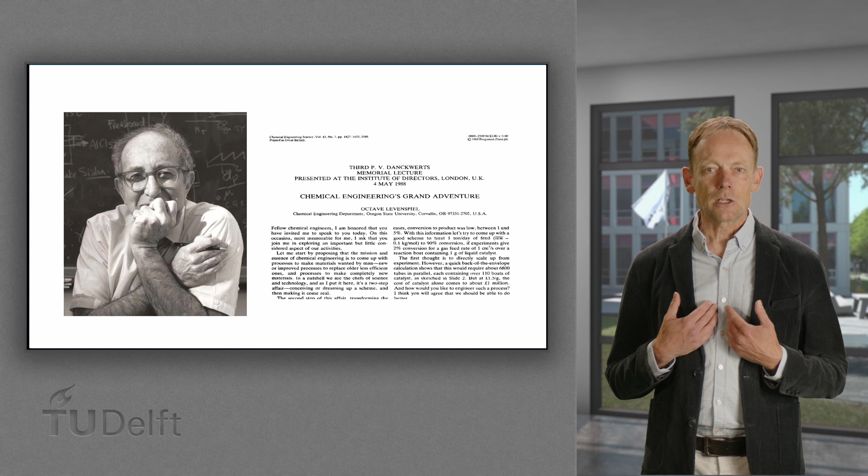One of the most influential professors in chemical engineering, Octave Levenspiel from Oregon State University in the United States, outlined in a 1988 publication the grand adventure of chemical reaction engineering. And this inspired us 30 years later to sketch what would be the grand adventure of biochemical reaction engineering, also known as industrial fermentation.

This course will bring you up to speed in this research and engineering field in a series of topics related to bioproducts, renewable feedstocks, how they are converted in large-scale bioreactors or fermenters, and what is needed to design, operate, and improve high-performance and robust fermentations. We will illustrate this with the key example of the monomer 1,3-propanediol produced from glucose and using bacteria at industrial scale. But also we'll highlight other examples that have been born out of the global bioprocess industry.

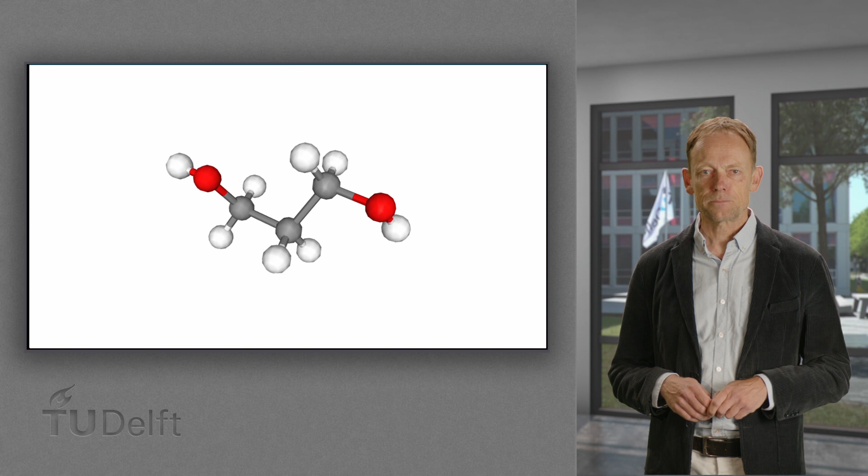The grand adventure of biochemical reaction engineering is then the creation and development of new bioprocesses to make tomorrow's bioproducts. This should anyhow be cheaper, better, more sustainable, faster and less risky than today. One determining success factor will be to maximize the industrial performance in terms of titer, yield and productivity.

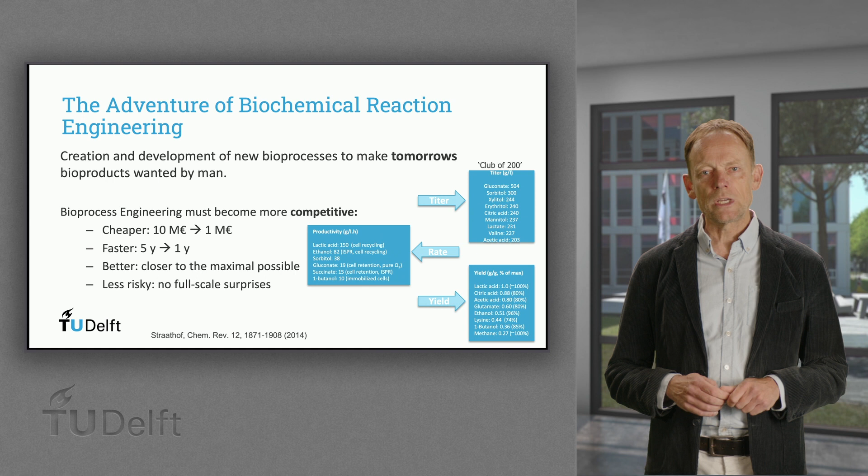As target for titer, we could take the Club of 200 as reference: documented evidence that a product titer of at least 200 gram per liter has been accomplished. For rate or productivity, we have witnessed examples of 10 gram per liter per hour and conversion yield examples within 80% of the theoretical maximum governed by thermodynamics. The second main success factor is to do this in a robust way without surprises.

It is good to distinguish two product categories, simple and more complex molecules. The simple ones will act as commodities, and the complex ones are more the specialties. They serve different markets with different needs, and the fermentation solutions will be largely different, as will be revealed in this course.

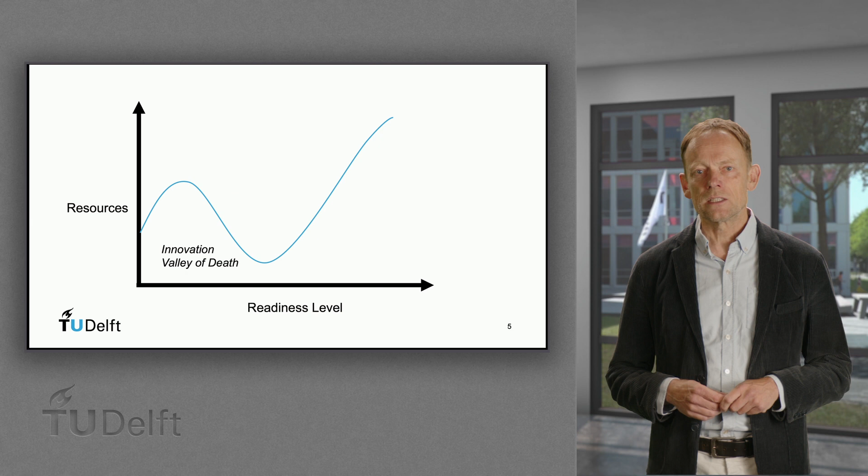Further important is to realize that a great idea and results in the lab do not guarantee commercial success. Many promising avenues have ended and will continue to end in the so-called innovation valley of death. In this course we hope to give you insights and instruments to cross this valley and achieve a higher rate of business success.

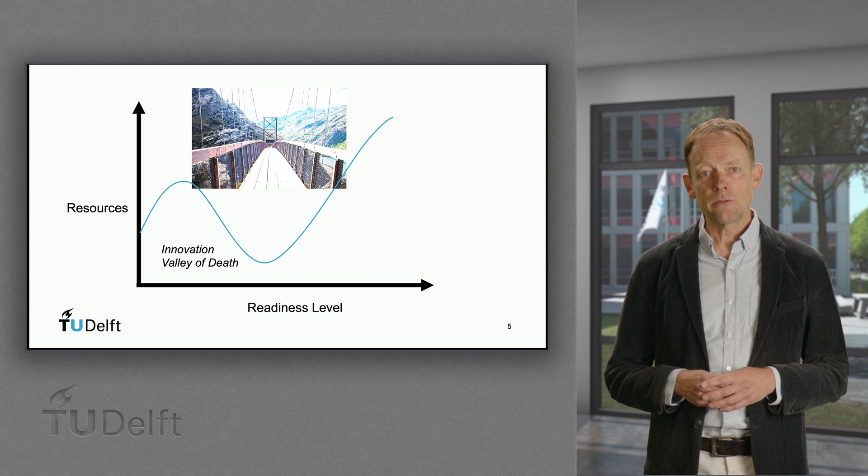The essence and mission of biochemical reaction engineering is then to come up with new and more efficient bioprocesses to make new or better bioproducts. And this is a two-step affair. First, we need to do the dream work, the conceptual design of the process and product. And only when this is done properly and with reasonable effort, then it is time to make it real: develop the process and engineer the factory. The dream work thus precedes the teamwork. And the rule is that better upfront thinking will unavoidably result in a faster and better outcome.

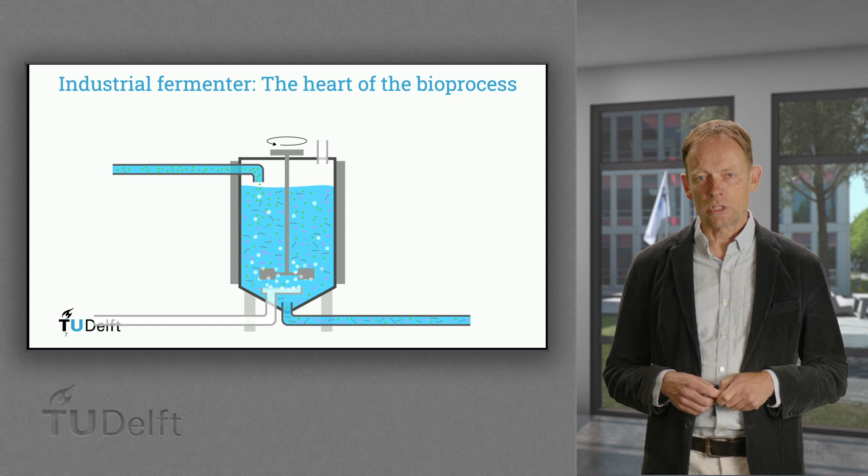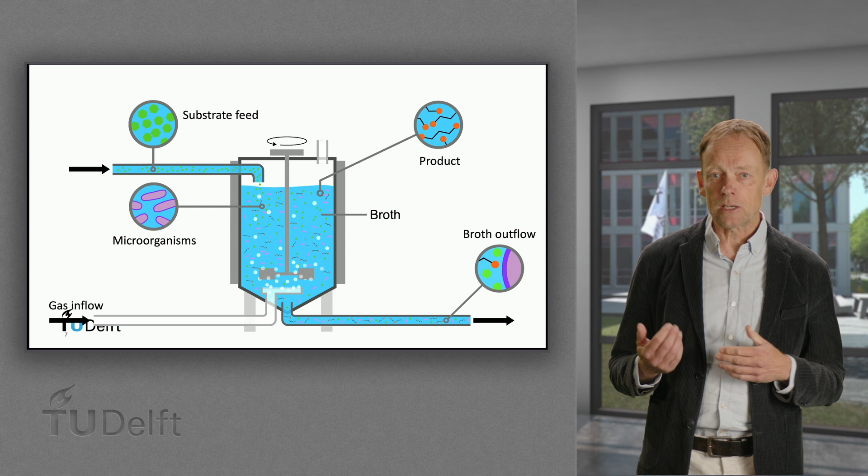The industrial fermenter or bioreactor is the heart of the bioprocess. There the renewable feedstock is converted into the desired bioproduct with the help of microorganisms present in the fermentation broth, tiny cell factories that are the masters of efficient conversion. Further needed is energy for mixing and often a gas like air, methane or carbon monoxide. Also, gaseous compounds such as CO2 and unused gas will leave the reactor. We as engineers should maximize the speed of conversion whilst maintaining the high efficiency or selectivity.

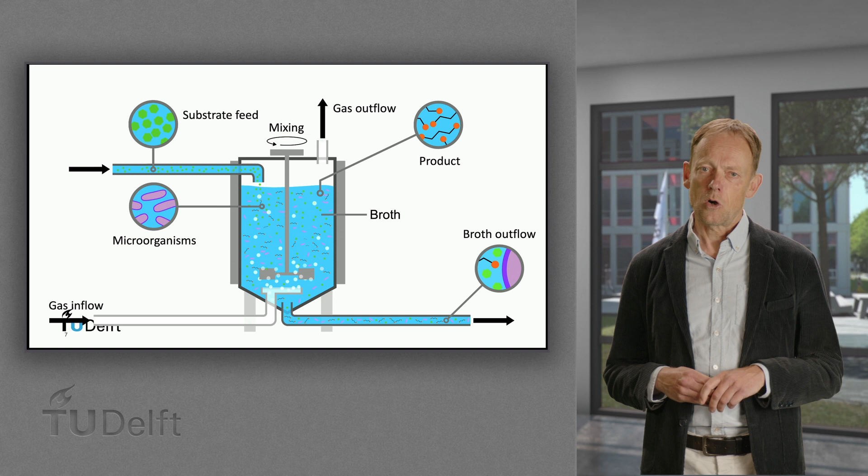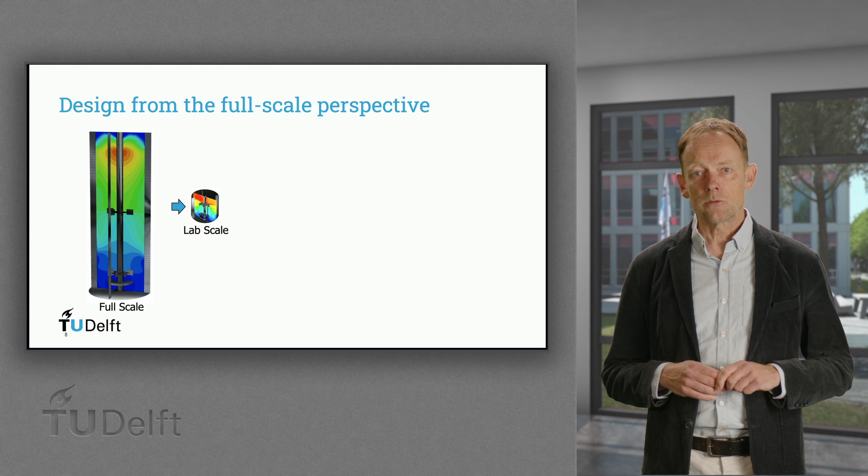An important rule, or perhaps better termed as design philosophy, is then to begin with the end in mind. The design of the fermentation process in the lab should be done from a perspective of execution at industrial scale. And this applies to both the medium throughput research and development stage as the high-throughput screening stage. Maintaining as much as possible the same environment of the cells in either scale, industrial, lab or screening, will secure similar performance and minimize surprises upon scale-up.

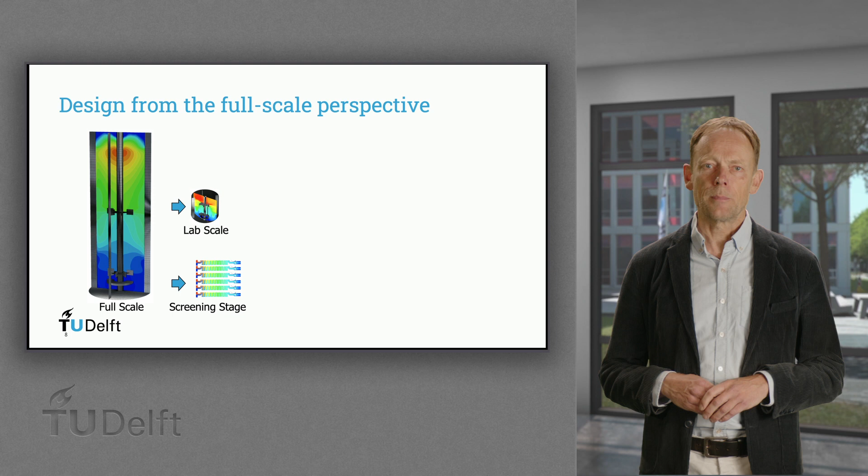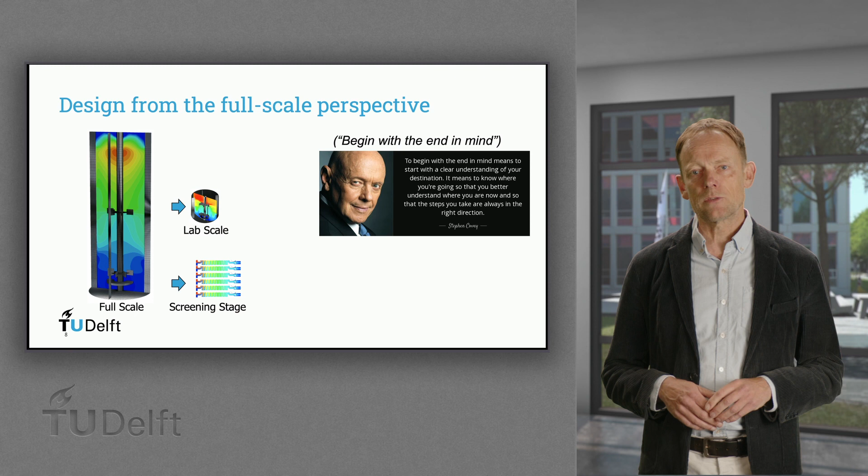The begin with the end in mind philosophy was first presented by the author Stephen Covey, and we have adopted it for our purpose with the following recipe. Begin with the product: its required amounts to be made, its properties and purity specifications. Then select the best feedstock for the product based on thermodynamics and verify if the conversion produces or consumes energy. And if the first is true, then a very large-scale anaerobic process might be feasible, which will be by far the most economic. If not, then there will be restriction in volume and cost, and economics and market deployment potential need to be carefully judged.

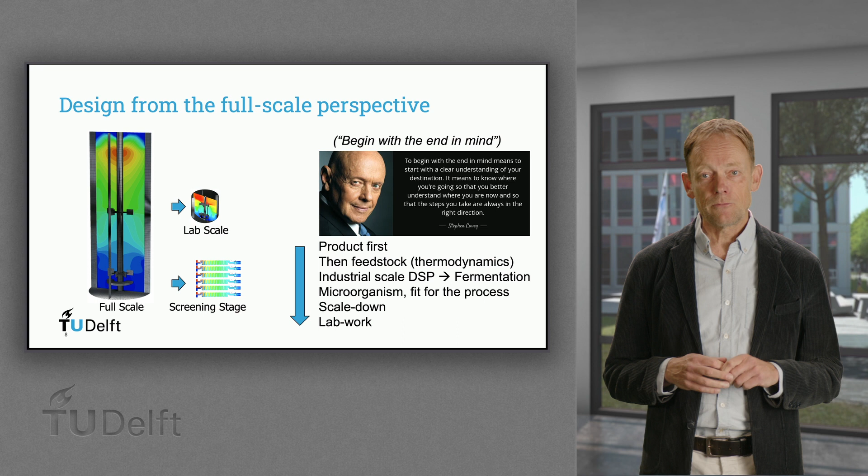The next step is then to select or develop the best microorganism for the process. Not the other way around, which is mostly the common practice today, but gives scalability issues. Nowadays, there are powerful strain improvement and evolution techniques available to tailor the microorganism to the task. Finally, the process should be scaled down to the lab and optimized there before scaling up to the industrial factory. This then presents an integrated approach to industrial fermentation development.

Operation in the factory, with limited measurements to satisfy minimum control needs, should be done jointly by factory and research experts. Optimization can be done either online in the factory or offline in the lab, where proper scale down of the cellular environment from the factory to the lab will minimize the risks of misalignment and scale up issues later on. And even when there is limited information from the industrial scale, we advocate this end-in-mind approach will be feasible and the best way to safe scale up.

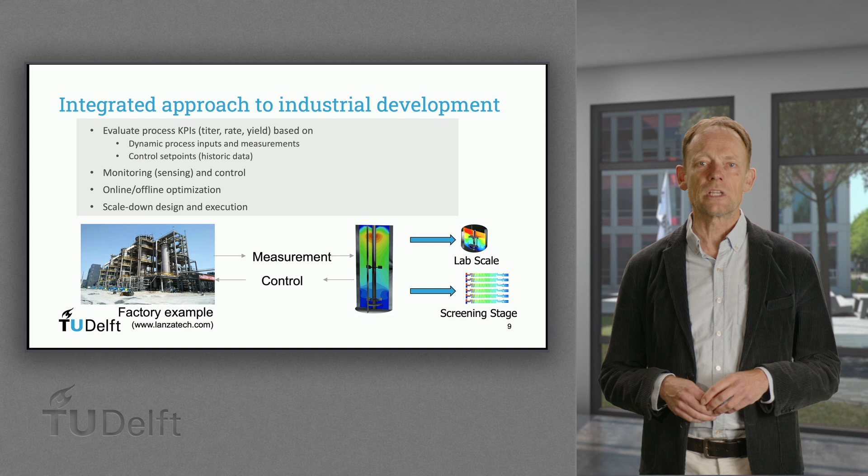The grand adventure in front of us then is to secure fast, environmentally sustainable and low-cost development and commercialization of tomorrow's bioproducts with minimal risks, failures and surprises upon scale-up. Conceptual design is highly recommended, where dream work precedes the teamwork. And this is often violated in academic education programs, where quickly one begins to deploy the engineering toolbox, the how, without having thoroughly scrutinized the available design options, or the what.

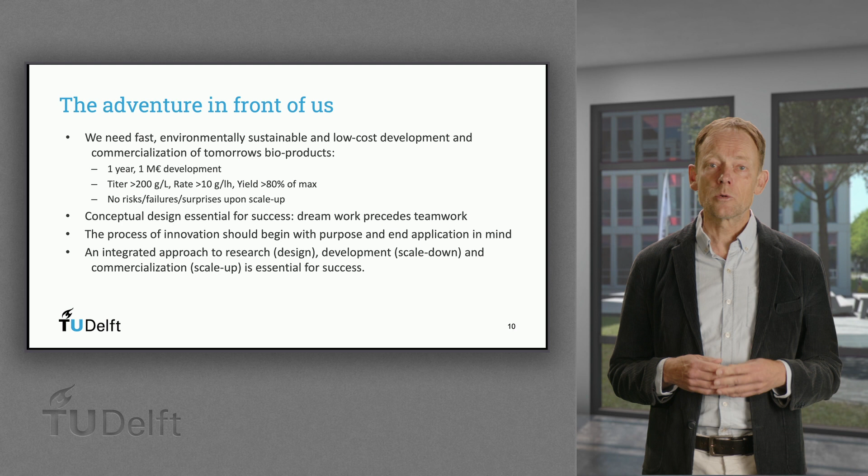The process of innovation should begin with purpose and end application in mind, and an integrated approach to research, design, development, scale down, and commercialization, scale up, is essential for success. I wish you an enjoyable adventure.